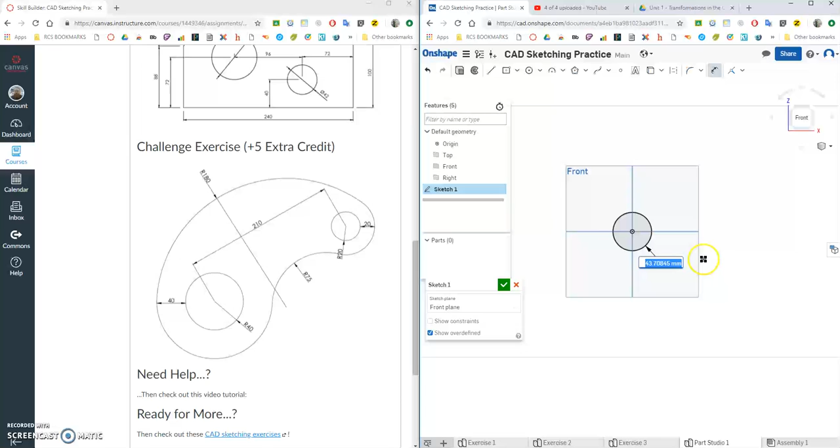I am going to start with this circle on the bottom, and I'm going to use that centered at the origin. So there's a circle that's 40 millimeters in radius. So here I'm going to be a little bit careful because Onshape defaults to using the diameter. So if the radius is 40, the diameter in this case is 80. I'm going to go up here kind of where I think this next circle should be. Sketch that circle. It says radius is 20, so I know the diameter is going to be 40.

And I know that the distance between the center points of these circles is 210, so let me go ahead and do that. Be a little bit careful how I orient that dimension. And now, I don't know exactly relative to this circle where it's supposed to be, and that's not actually going to matter too much for this one, because I don't need to know the orientation of this circle. So we'll work through the rest of this, and hopefully everything should be worked out.

Now if I got this circle, I got this kind of jelly bean shaped thing around the outside. And if I think about what's going on here, what I have is part of a circle here, part of a circle here, part of a circle here, and another part of a circle here. So I really got just a bunch of arcs that are part of the circle surrounding this. And so I am going to, again, start with the bottom one here. I'm going to draw a bigger circle around this. This is going to form this part of the edge.

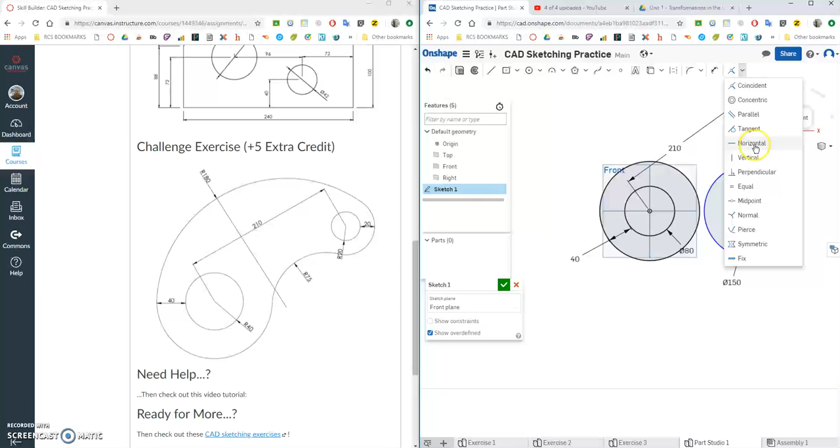So I'm going to draw my circle. I know it's got a radius of 75. So that gives it a diameter of 150. And I know wherever the circle is located, it's got to touch both of my other circles. So there's a couple ways we can do this. We're going to need to use some of these geometric constraints to make this work.

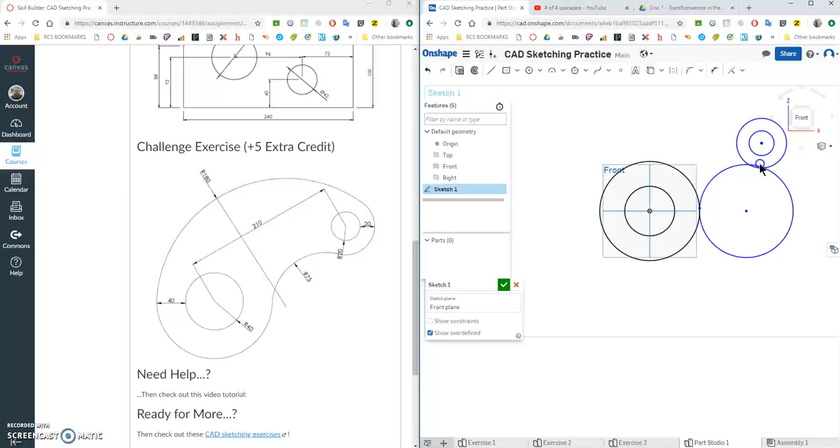So I think the first thing I'm going to do is put a point on this circle, and I'm going to drag this point and attach it to this circle. And so now these two circles are attached at that point. And I'm going to do the same thing up here to this circle, because I want these two circles to touch. And I can drag this up here, or I can use what's called the coincident tool. Coincident will make a point lie on a curve or a line. And so now that's adjusted so that I got a point on the circle.

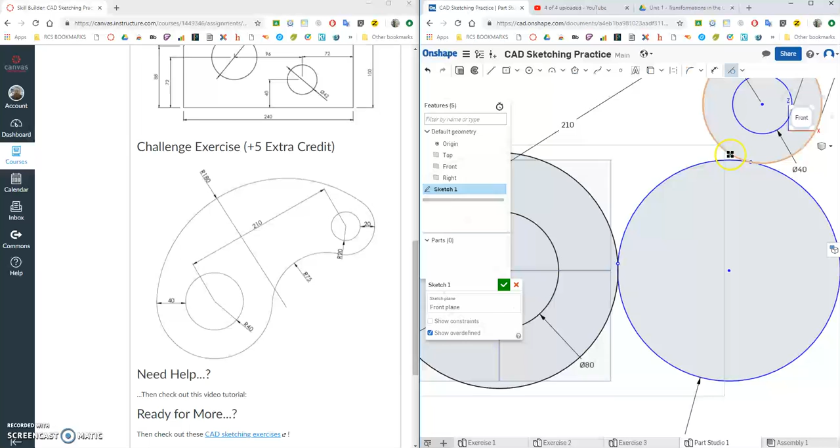Now, the other thing I want to look at is that these two circles don't look like they overlap each other like this one up here overlaps. Looks like they should probably only touch each other at one point. And that's what's called a tangent. And so in this constraint menu, there's something called a tangent constraint. If I click two lines or curves, or a line and a curve, it's going to make these curves intersect at only one point. I'm going to do the same thing down here to make sure that's tangent as well. And so you'll see that all my blue lines have turned black. It's fully constrained now.

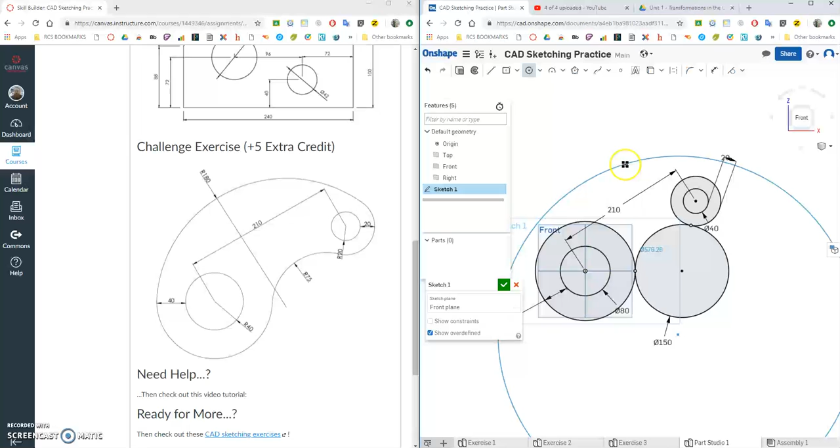I'm going to do kind of the same thing with this big guy up here. This is a big circle. It's got a radius of 180. Its center point's got to be down here somewhere. So again, I'm just going to start by sketching this big circle. And I believe that this guy's got to be tangent to this exterior circle here. So I'm going to make that tangent. I'm going to make it tangent to this circle. And now I think I've got enough to finish this thing up. Let me go ahead and dimension the big circle, which is 180, so the diameter is 360.

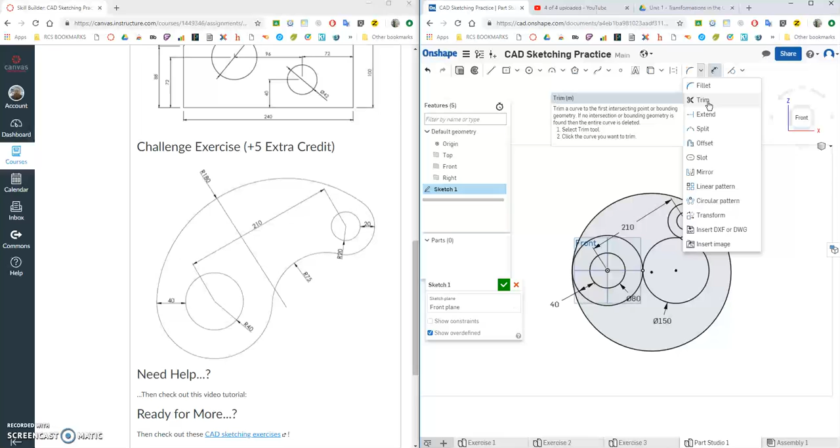I got a lot of extra stuff here that I don't need. If you look at your menu, there should be something called trim, and trim will remove part of a curve that's intersecting another part of a curve. So I'm going to click trim. I don't need this big part of the circle down here. I'm going to get rid of it. I don't need this big part of this little circle down here. I'm going to get rid of that. And what I end up with is a jelly bean that looks pretty much like this jelly bean.

Let me go through and clean these guys up too. Those are parts of the design that I don't need. So that looks pretty similar. I think we are good to go. No blue lines. All the lines and curves are black, so that means everything is fully dimensioned.